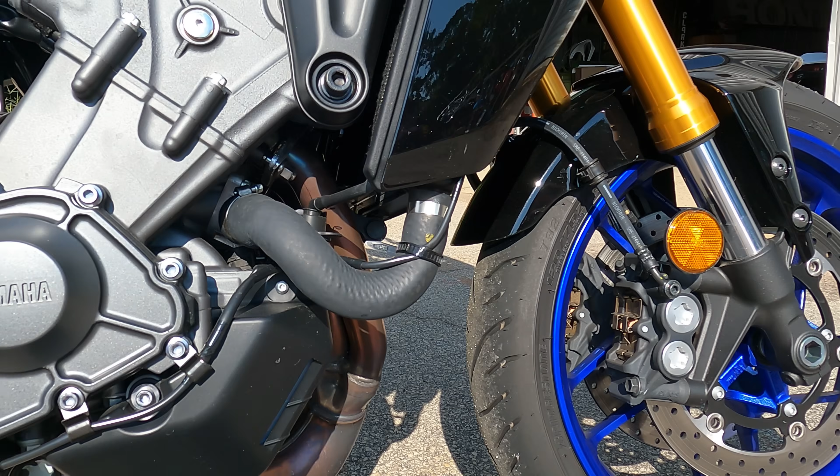Then we're gonna install an Akrapovic full exhaust system. Now this factory exhaust is quite possibly the stupidest looking exhaust I've ever seen in my life. It's just a big blob of pipe, and right here is where the exhaust comes out, shining down right at the ground. When I first walked out and looked at the bike, I was looking around for where the exhaust came out, and I'm like, holy shit, this thing is crazy. Anyways, the exhaust is down there on the very, very bottom. We're gonna remove that and see what kind of power we can get out of this thing.

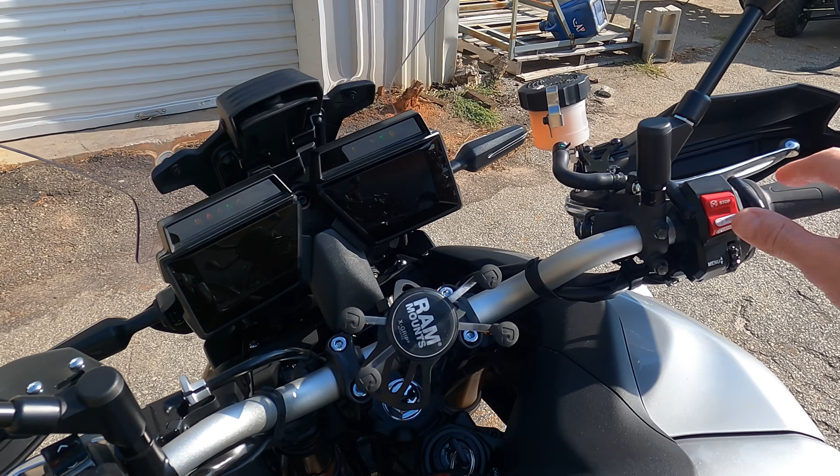Also, what kind of sound. Let's fire it up so you can hear it now. Pretty quiet, as you can imagine, just like all other stock bikes.

Now, as you can see from the exhaust headers, this thing is a 3-cylinder, so it's gonna sound really unique and really different once we get the exhaust on there. Anyways, enough talking, let's get to work and put this thing on the dyno.

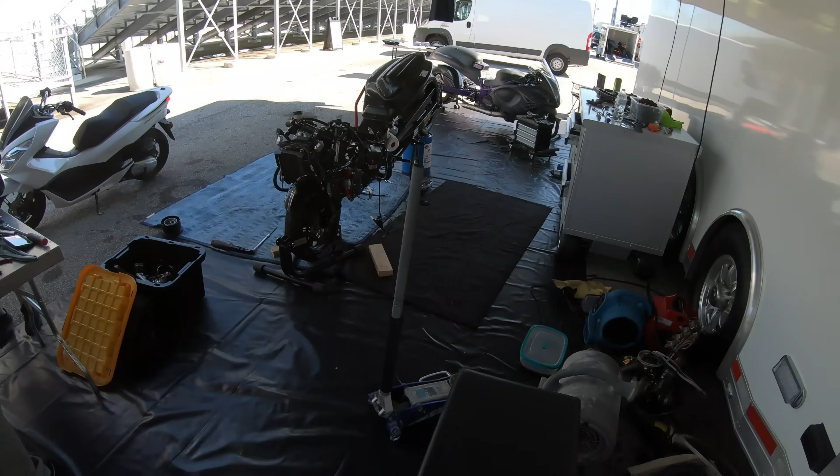Okay, the bike is all loaded up on the dyno. We've got it warmed up. We're about to do the baseline pull and see what kind of power we can get out of this bike. I'm really curious to see how this thing does. It is super, super quiet. I'm really curious to see what this Akrapovic exhaust does for the sound and for the power.

Set you guys up right here. Now, we will not be getting an air fuel reading on this pull because of the way the exhaust is made, I literally can't get my O2 sensor into that exhaust system. So it is what it is on this one, but we're gonna see what kind of power we can get once we fine tune the air fuel ratio with the new exhaust installed.

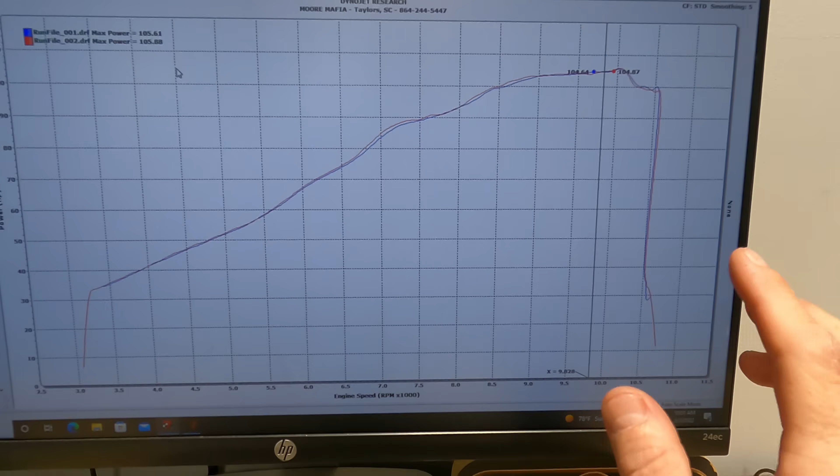Pull is done on this Tracer 9 GT. We ended up with 105 horsepower. We did 2 pulls with it: a 5th gear pull, which is what we always dyno them in, and then a 6th gear pull to see what the actual top speed of the bike was.

Okay, so if we put this in wheel speed instead of engine speed, we can see we have a theoretical top speed of about 150 miles per hour. Now when I say theoretical top speed, there's no wind, no drag, nothing. This is just how fast can the wheel turn on the drum. In other words, this is what the bike is limited to with no other real life factors. So if you weigh 300 pounds and you're built like a parachute, your bike probably ain't gonna go 150 miles per hour with you on it. If you're going downhill and you only weigh 100 pounds, you might actually go 150 miles per hour because you got no limitations, just like this bike does.

So anyways, this is just a relative thing. Let's put it back in engine RPM, which is more real life. I just wanted to point that out with the top speed. We're gonna see what the top speed is increased to. Now, let's look at this and we can see it makes 105, almost 106 horsepower at 10,000 RPMs.

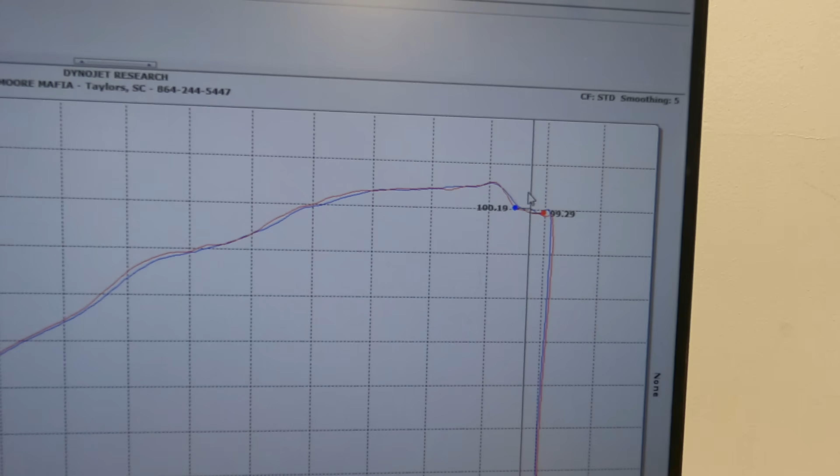And then the horsepower nosedives back off. We lose about 6 horsepower, back to about 99 and 100 there at 10.3. So it falls off really, really quick. Let's talk about why that happens.

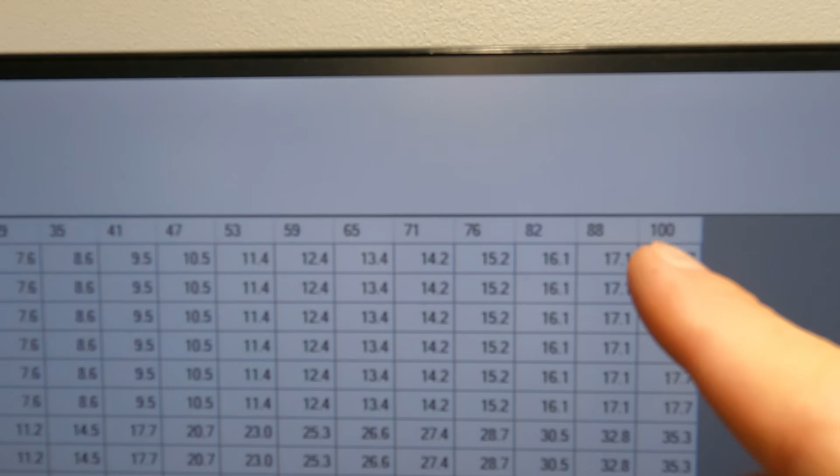So if we go into our MT-09 Tracer GT bin file in the ECU, this is what the stock ECU looks like inside. If we go to first gear, this is our ETV, which stands for electronic throttle valve. Here is 100% throttle, and here is the engine RPMs. Now this 100% throttle is when you twist the gas like that, you go wide open, it goes to this table, and then it scrolls down as the engine RPMs go up. Take a look at this, guys, at let's just say 5,500 RPMs.

You're only getting 46% throttle, even though you're wide open. So you've got the hammer down, but you're only getting half power at 5,500 RPM, meaning this thing has huge restrictions, especially in first gear. The highest it ever goes is 85%, and at 10,100 RPMs, it's declining back to 79 and 78% throttle in the high RPMs. So essentially your bike has a governor on it. You bought a brand new 900cc bike, but you're not even getting full power.

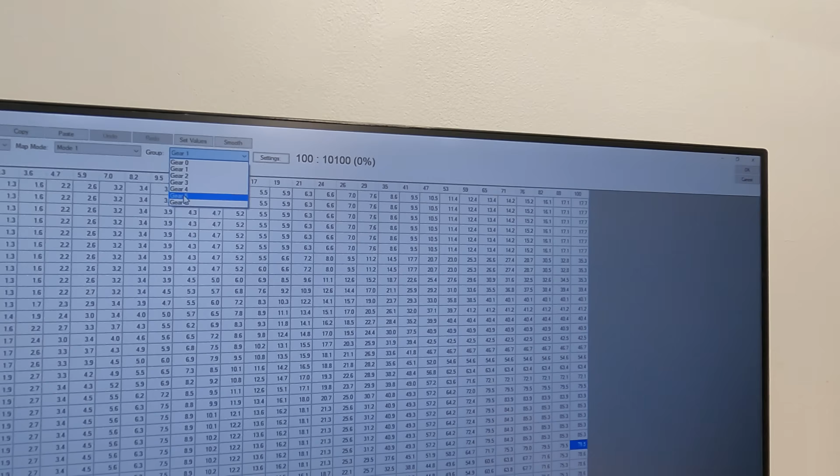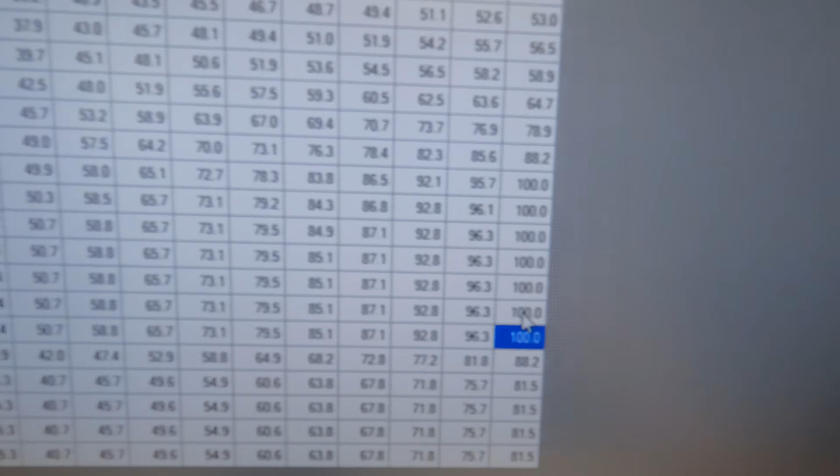So we dynoed it in 5th gear. Let's go to our 5th gear tables. You can see here it's slow to open once again. It does go 100% throttle at 7,000 RPMs, and it stays 100% throttle to 10,000, which is pretty much what our dyno graph showed us.

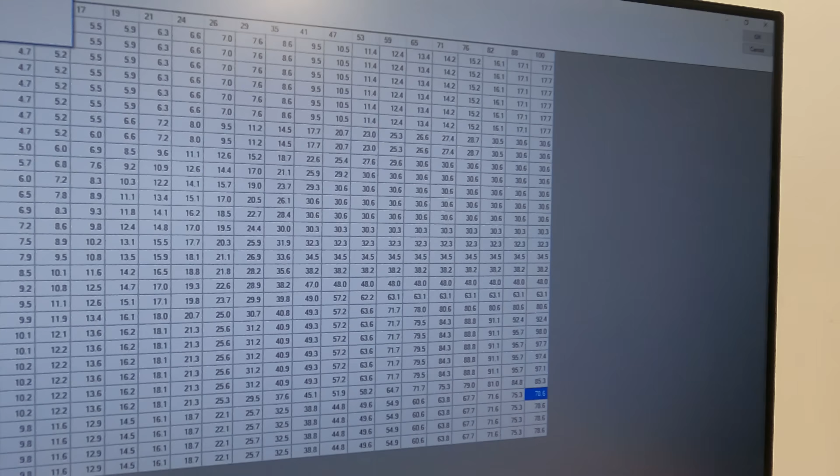But you can see here it falls back to 81% throttle. So we got a big decline. Now we're at 81% throttle in our fifth gear. We were getting a total of 85 horsepower. So technically, theoretically speaking, in our 5th gear, we're limited.

So this is 80% throttle. The other one was 80% throttle. Technically, we're limited to about 100 horsepower in fifth gear. So it's got a pretty good cap on it. That's the most you can get out of fifth gear. 6th gear, pretty much the same restriction, 81% throttle.

So we're gonna uncap all that stuff, get all the limiters off, and see what kind of power this thing will make once we unrestrict it. And of course, we're putting the exhaust system on, so we should get some pretty nice gains here.

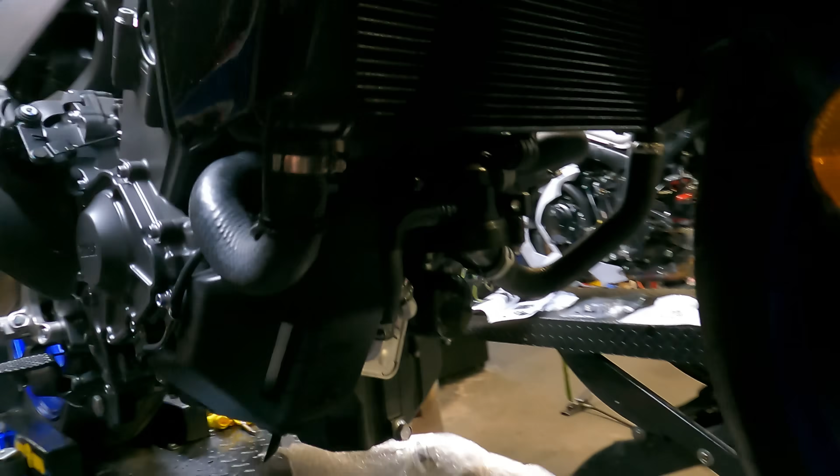Let's see what happens. And just like that, the factory exhaust system is off. We've got it right here. This thing is pretty heavy. You can see it actually has 2 outlets for the muffler. I didn't even realize that when it was on the bike. But anyway, this exhaust, super heavy, would be used as a good boat anchor now.

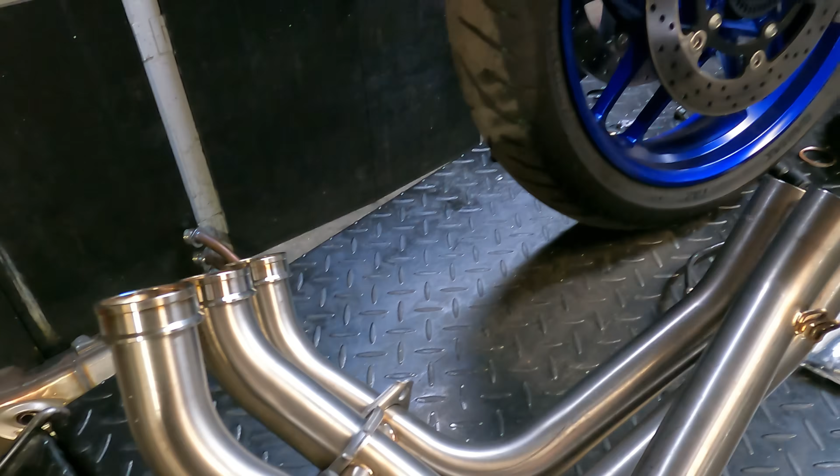The factory headers, or the aftermarket headers, much, much lighter because of course we're getting rid of that heavy catalytic converter. I think this is gonna be a really nice upgrade as far as horsepower goes and as far as visual appearance. We'll have this thing on here in no time.

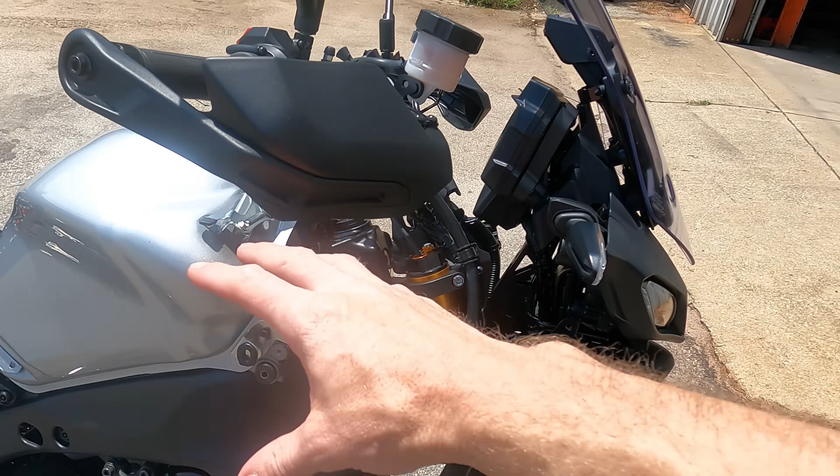Just like that, the exhaust system is on this MT09 Tracer GT. Now you can see we're missing a bunch of the fairings here. We had to remove that stuff so we could gain access to the ECU. The ECU on this bike is under the fuel tank on top of the airbox.

So if you're gonna do an air filter on this thing, you better do an ECU flash at the same time, boys, because it's a good bit of work to get to it. But anyways, let's fire this thing up. Now that we have a normal looking exhaust system on this thing, let's see how it sounds.

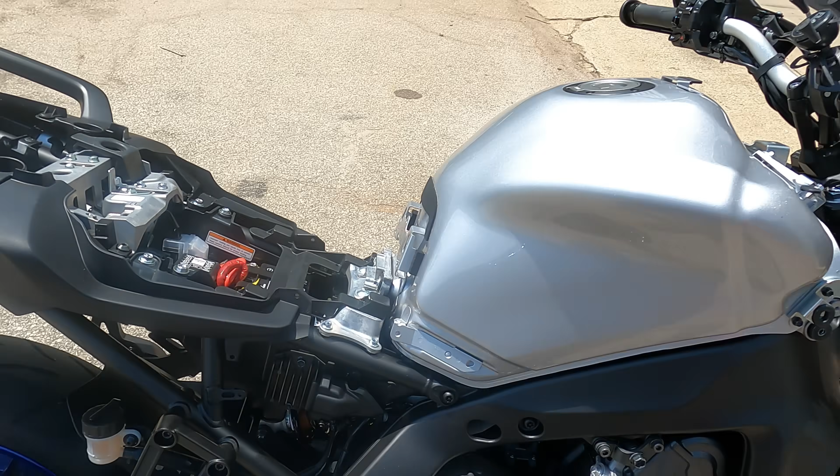Now I have already warmed the engine up. That was not a cold start, but man, this thing sounds a million times better. Not crazy, but definitely has a nice sound to it.

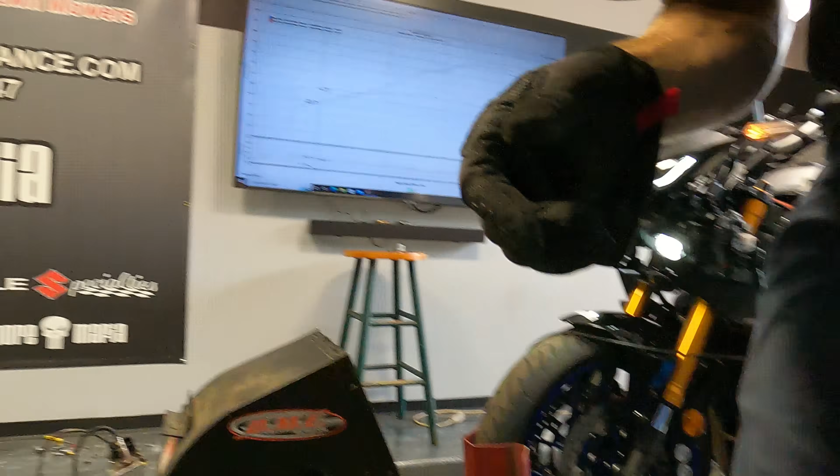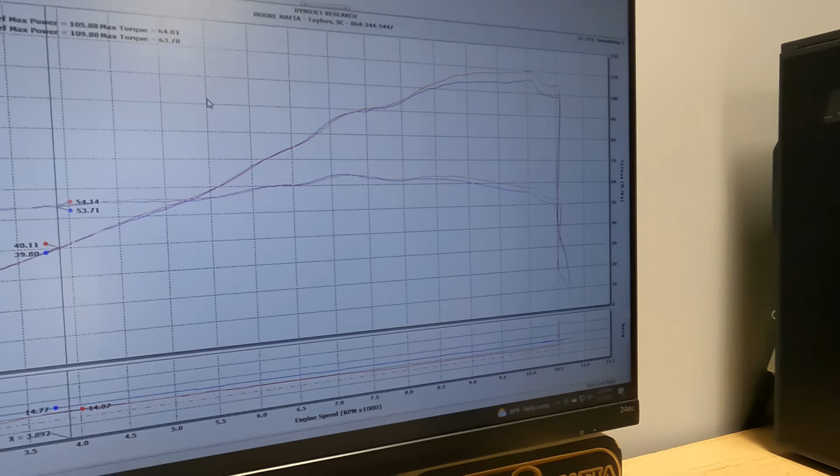But boom, there's your 4 horsepower, boys. And I promise I didn't cheat, I swear. Anyways, I could tell that the thing wasn't incredibly far off whenever I was warming the bike up as far as the air fuel ratio. You can see it's lean, cruising around and wide open, but I could tell it wasn't horrible. So that told me right there it wasn't gonna gain tons and tons of power by putting this exhaust system on there.

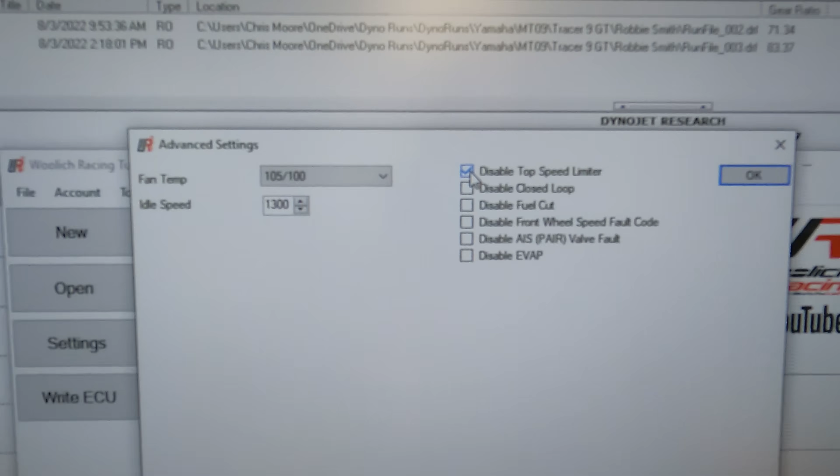Now, how much are we gonna get once we unrestrict it? Well, that's what we're about to find out now. Take a look at some of the things we can do in this ECU. First thing we're gonna do, disable the top speed limiter. We're gonna get rid of that, so now there's nothing holding the bike back from top speed.

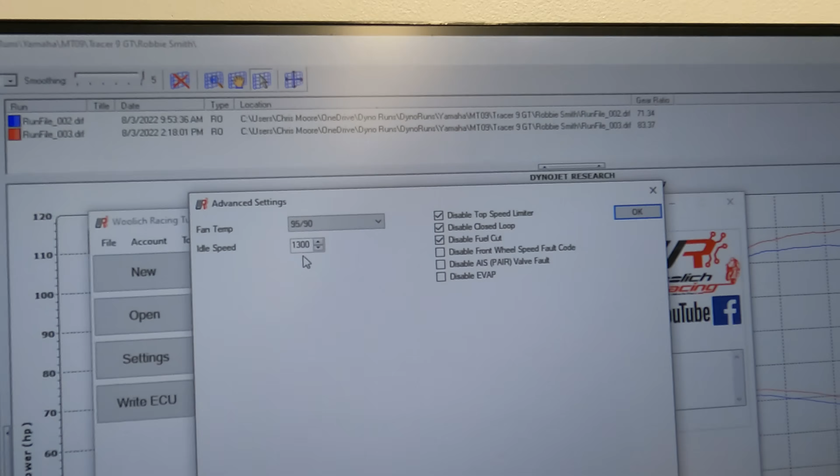Disable the closed loop system. So these things have O2 sensors on them from the factory. The O2 sensors tell the bike to run super lean all the time. We don't want that. We want it to run off of our tune. So we're gonna disable that, and then we're also gonna disable the decel fuel cut. That way when you let off the throttle, the bike doesn't nosedive. In other words, the engine braking will be reduced, and we'll make this thing much, much smoother in the on-off throttle transition. And then we're gonna lower the fan temps down.

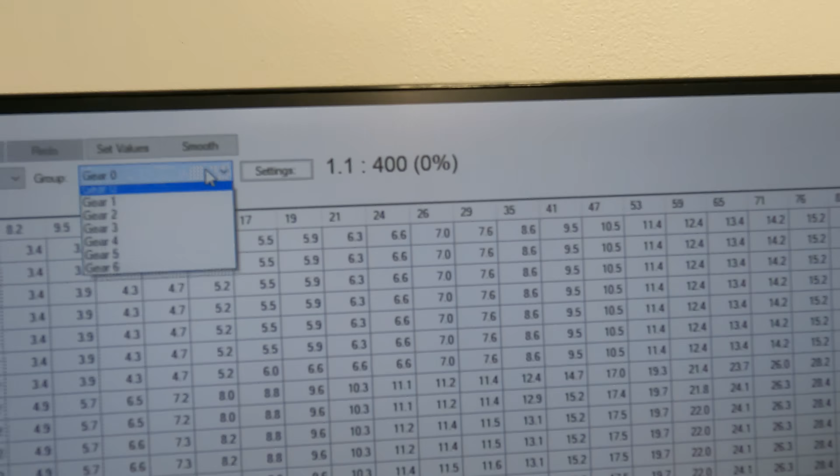Let's go in here and see what kind of restrictions we've got. You can see here, this is the ETV table. That stands for electronic throttle valve. And then we, of course, have different gears. So if we put the bike in first gear, you can see that this is our throttle position value opening. So in other words, whenever you twist the throttle, go 100%, that goes to this side.

And then when we go over here, this is our RPM table. So when we go 100% throttle in first gear at 6,500 RPMs, you're getting 63% throttle. Yeah, that's right, guys. You bought a 900cc bike.

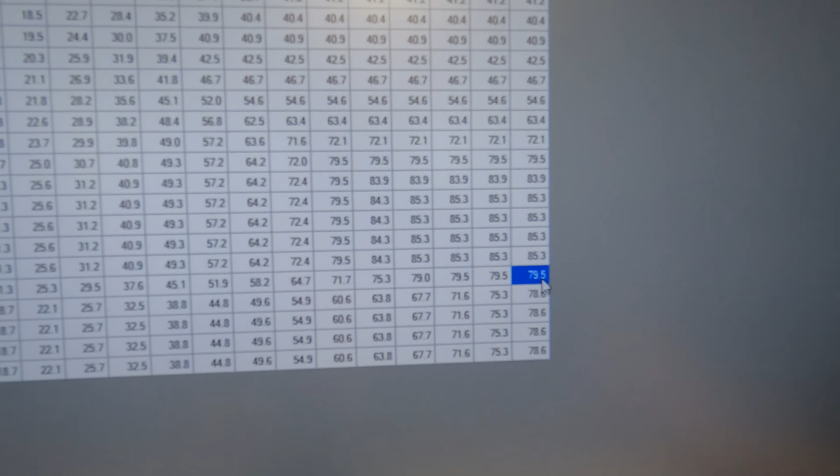When you get in first gear and hold it wide open, you've got a 900cc bike. Only 63%, it goes up to 85, and then at 10,100 RPMs the throttle plates start closing, it goes back to 79%. Then here in 5th gear, you can see the thing is delayed opening.

I'm pretty sure we already talked about this. I can't remember, I've already done another video in between now and then while Dazzling Drew was installing the exhaust. Long story short, I gotta get this thing fixed up. I'll be right back with some more horsepower.

ECU is flashed, air fuel ratio is almost dialed in perfectly. One thing I will mention is that this thing gets a little bit of popping and gurgling on decel. Not much, but it does have a little bit of backfire to it. That is because we have the decel fuel cut option turned off. So when we let off the gas, a little bit of fuel continues to spray into the throttle body, keeping the bike from going lean and nosediving. That unburnt fuel will get a little popping every once in a while. It's not bad, but if you wanted to fully delete it, you can look into doing a set of AIS block off plates, or Google and search the marble mod. You can also fix that super easy. To me, it sounds good. It's not annoying, it's not a lot on this bike. Let me know what you think.

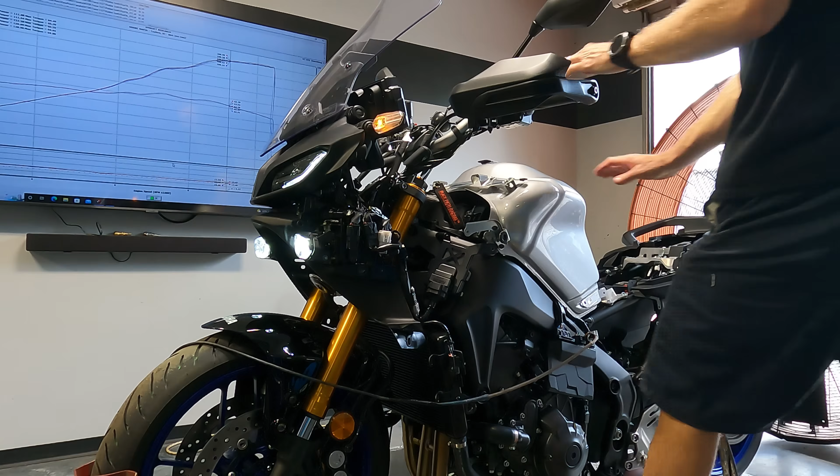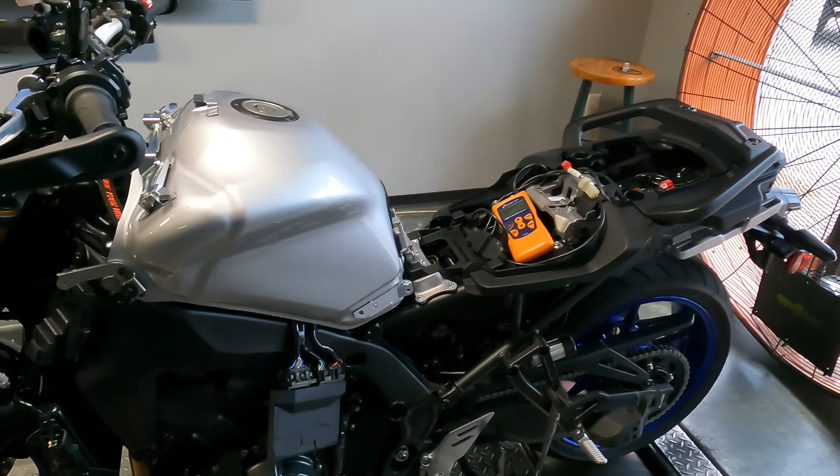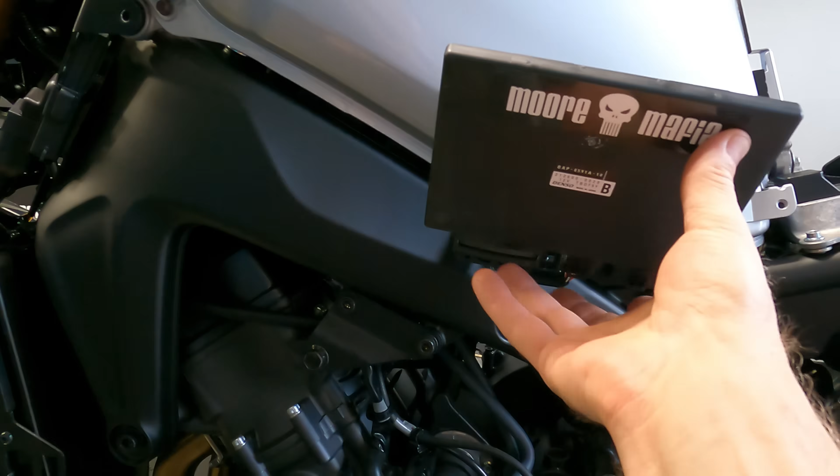Dyno tune is finished, we ended up with some good numbers. Before I get into the numbers though, I'm gonna show you right here is the ECU. It is under the gas tank as far as where it is located. This is not the ECU, so if you take your bike apart, do not think that's the ECU, that is the electronic suspension brain. This, on the other hand, is the ECU. It is mounted under the gas tank, about right in there. So you do have to lift the tank up to get your ECU out to send it in to get it flashed. Another thing you'll have to do, anytime you work on this bike and you unplug anything, it senses like a system break and it throws a check engine light.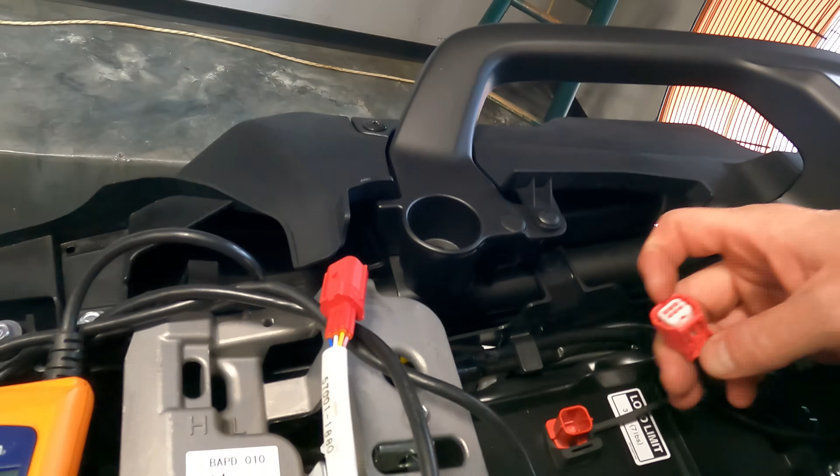The check engine light will not go away on its own, you do have to clear it out. That's a simple procedure. Right here is a little plug on the bike, you just pop that cap off, plug in our little trusty gizmo we have here. We sell these on our website, mooremafia.com, and then you can clear out the code by yourself. Super simple, that is a must after the ECU is flashed or anything is done on this bike, basically.

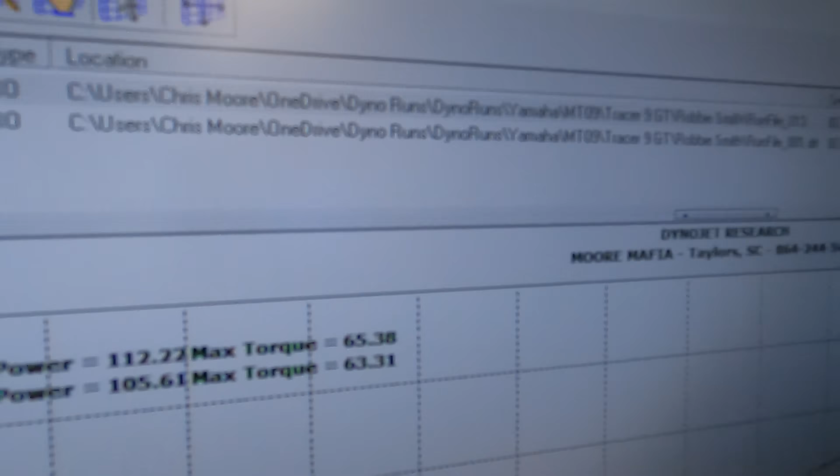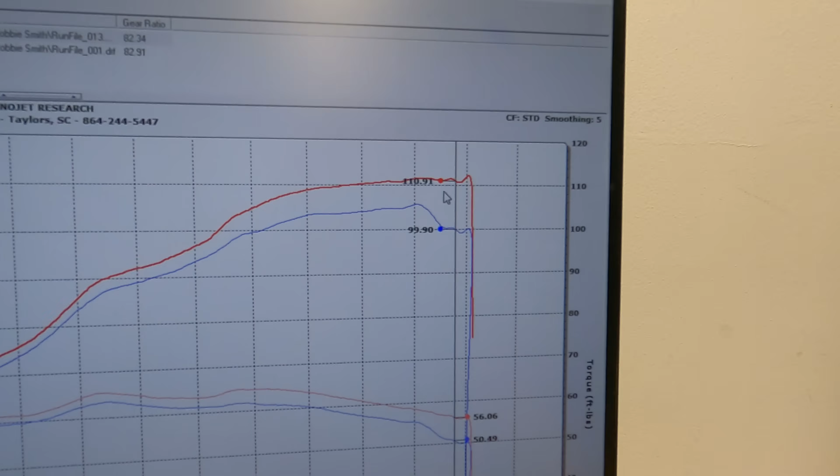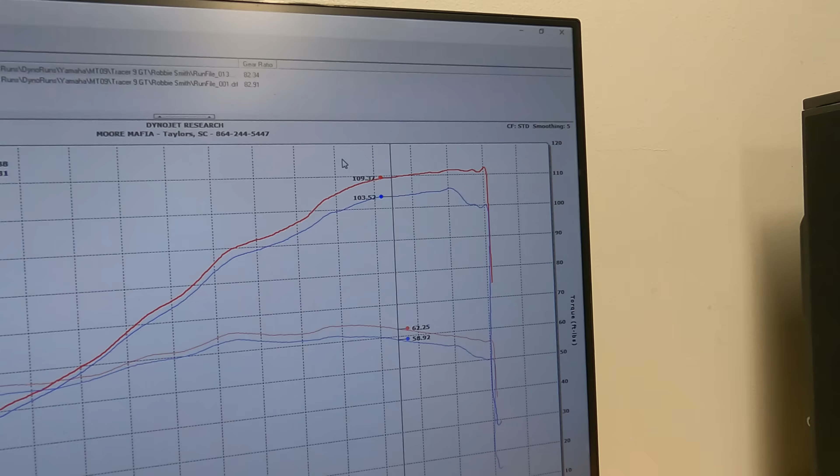All right, let's get into the dyno numbers. We started out with 105 at the beginning of the day, we ended up with 112.22. Now, one thing I didn't like, we are not able to extend the rev limiter on this bike. This bike revs all the way to red line, in other words, the power makes peak power at red line. So if we could rev it a little higher, I think we could get a little benefit out of that, but in this ECU it's not adjustable. You can see here, at 10,300 RPMs, we went from 99 horsepower to 110 horsepower. That's a 10 horsepower gain there just from the tuning. Overall, went from 105 to 112, and the power is throughout the whole entire thing.

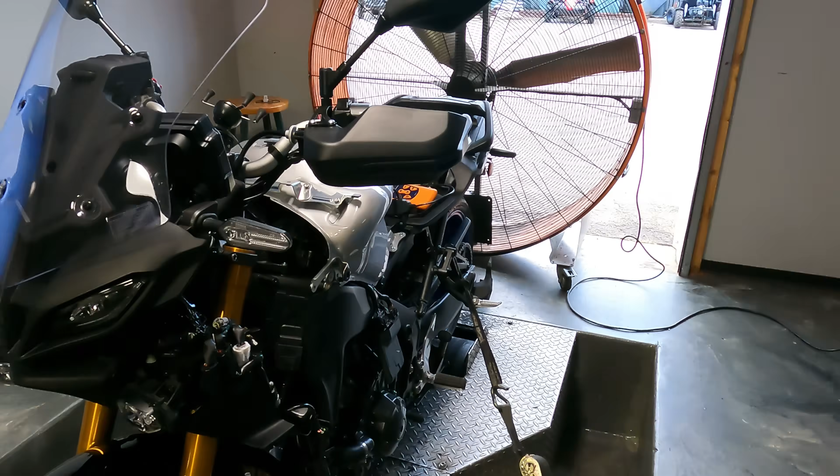Not to mention we lost a good bit of weight, we gained a good bit of improvements aesthetically, and the thing sounds like a real motorcycle now. We're gonna get it put back together, get it buttoned up, get it outside so you can see a better look at it of how this thing looks. 100% finished, guys, stay with us.

Finally, it's been an all-day project, but the Tracer 9 GT is finally ready to go. I wanted to show you a glimpse of what it looks like fully assembled and put back together. We had the exhaust system on earlier, but we had all the fairings off. The fairings are not too terribly hard to work on now that we know how to do it. Your first time in, it is a little tricky to take this thing apart. I'm sure there's a video somewhere that shows you how to remove all this stuff. We didn't get to go in depth and detail on showing you how to take it apart, but let me tell you, it is fun.